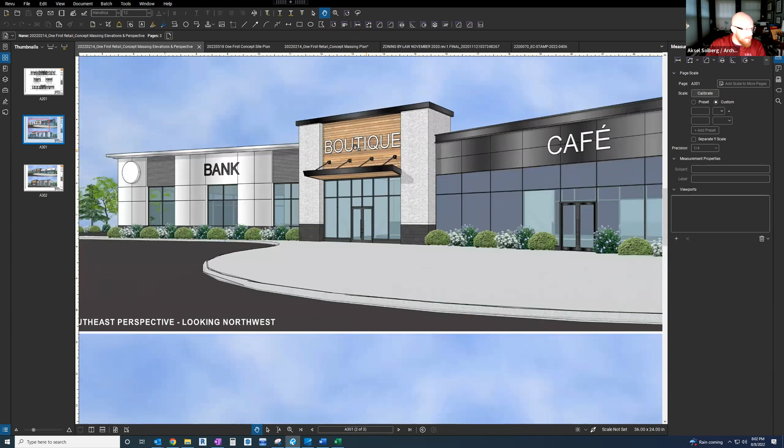There's also some wood plank cladding - this could be a variety of different types of products. And then panels, which could be either metal, fiber reinforced cement, or some other synthetic type of material. And then we have a horizontal corrugated metal to facilitate a little break in the massing and emphasize some signage areas.

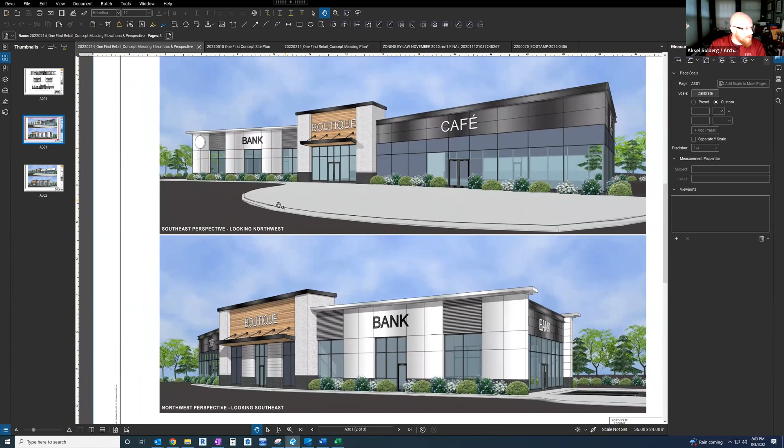So overall, there is the configuration of the site, which I believe everybody has seen for now. Actually, I'm assuming that everybody already has seen this imagery, so my talking points will sort of assume that, but if anybody wants me to stop at any point to ask detailed questions, please feel free to chime in.

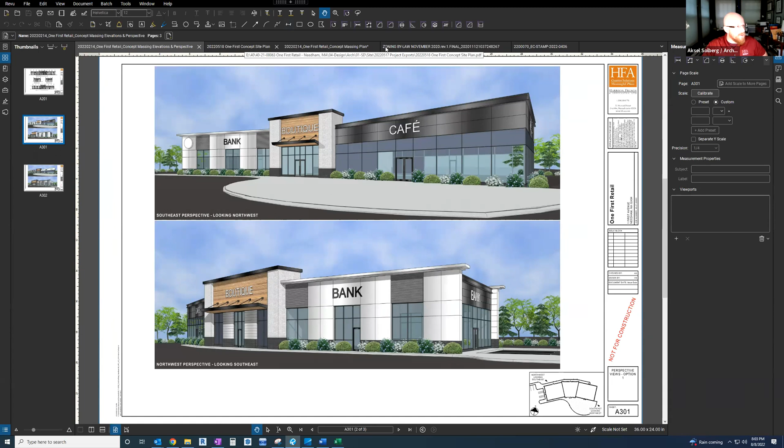Aksel, just orient them on the site plan where this is on first. That's exactly where I was going next. So here we have, let's see, this is the survey of the site.

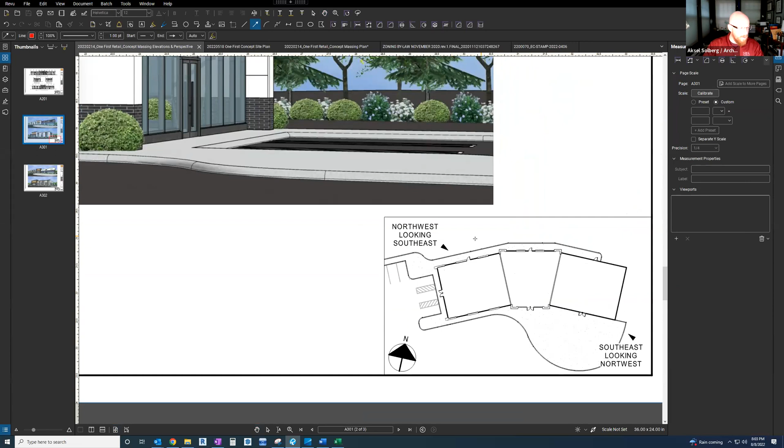So right here, this is Highland Avenue. You're coming off of the highway here. This is where the old Acapulco's building is - you can see the footprint on the survey of the site. So now if we go back to the key plan here, Highland Avenue is right here, and the entrance off of the highway is here. The Acapulco's building was generally somewhere right around here.

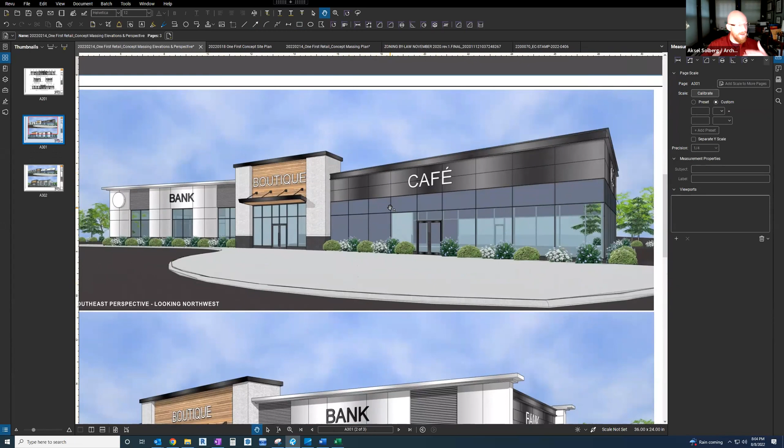So from this side, we're looking at this perspective from the vantage point of standing in the parking lot, looking at the side of the building which faces inwards towards the Innovation District. Down here, you could imagine yourself in a vehicle on Highland Ave waiting at the stoplight, and this is what you would see. This is kind of just a basic visualization. Further renderings would be more polished, but I think this gives the overall vibe and design intent we're going for.

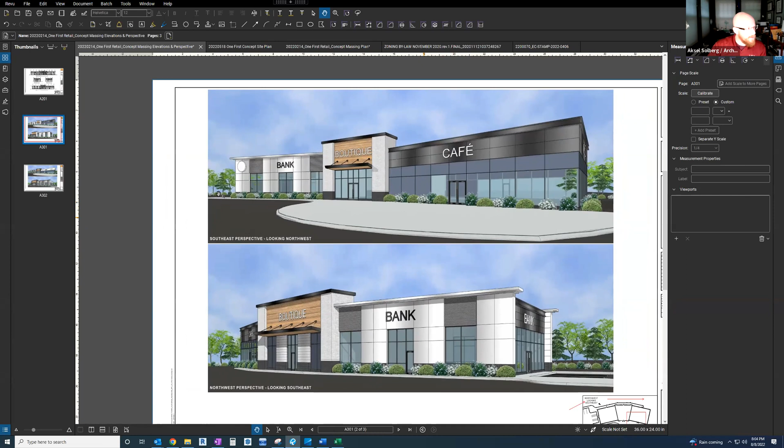The massing varies in height just to provide some differentiation for each tenant. Here's the elevation unfolded view looking at the building from the new parking lot we would be creating. Actually, this view is from Highland Avenue. On the right, you have the bank tenant. In the middle, you have the retail tenant. On the left, you have the restaurant tenant.

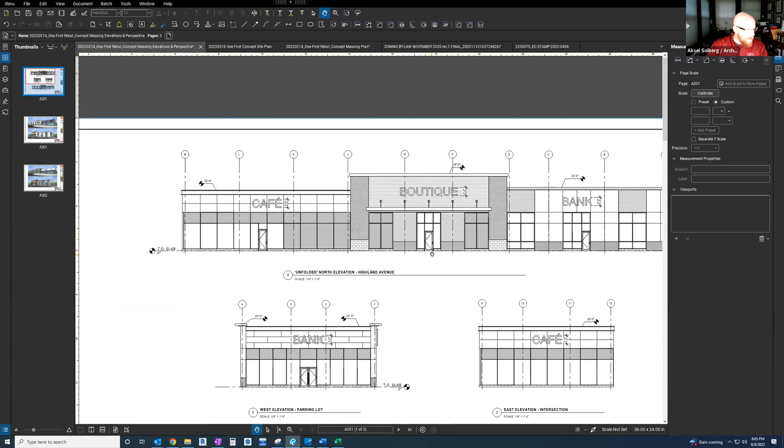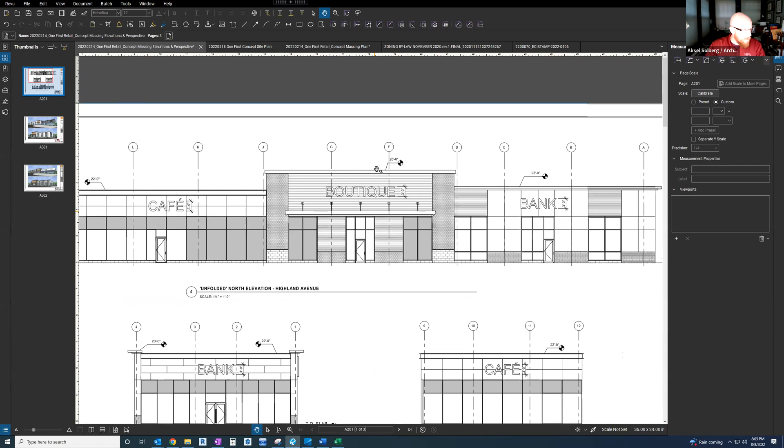The building is designed to be four-sided, quote unquote, so that any vantage point of the building feels like you're looking at the front. There's no back of house that you're seeing, so no ugly facade is presented to any one perspective. Signage area is maintained at a comfortable eye level above grade. We have a maximum height of 28 feet, which is still well within the means allowed by zoning.

When viewed from the parking lot, the retail tenant is given a little more height to establish dominance, knowing that bank tenants aren't usually so concerned about the pop of the brand, given that the location normally sells itself. The restaurant tenant, we wanted to go for a more modern, sleek vibe, knowing there are restaurant tenants we could go after who are attracted to this type of aesthetic.

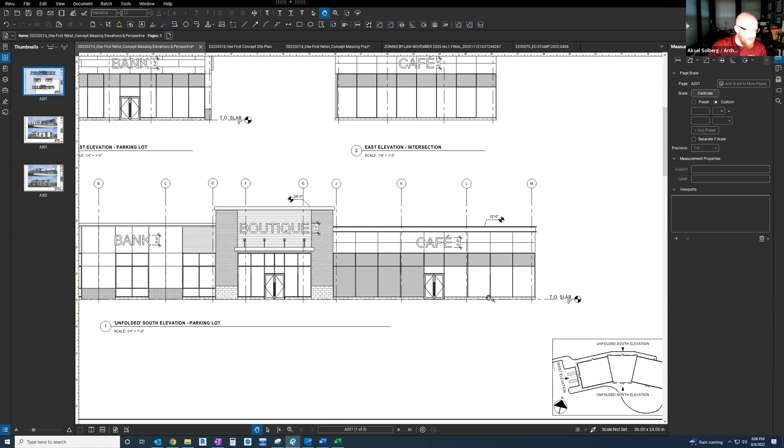The areas shaded gray in the storefront elevations would be spandrel glass or opaque. The reasoning is to provide the restaurant tenant some privacy or screening for the back of house functions that normally accommodate commercial kitchens. That way you keep all the inner functions hidden, and really the only transparency is into the actual seating area itself, so you can see all the vibrancy and activity happening inside.

So here's how that would look. You see the opaque panels provide some privacy, and the interior design would shine through in that regard. I think overall that's the nutshell summary of the building.

For the retail tenant, we gave them a prefabricated suspended canopy to provide some cover from the elements. The restaurant tenant has a comfortably sized seating patio, which would be landscaped and developed using a nice texture of materials to create an ambiance that invites people in from the surrounding innovation district. And then the bank as well.

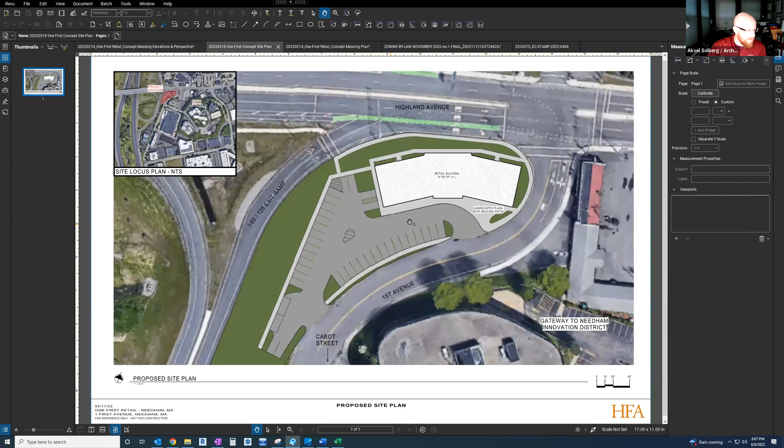Our site plan right now is preliminary at best, but it's showing proof of concept that we can achieve configurations of parking which get a good count. This is just one of the few options we've explored, but here you can sort of see the intent behind what would happen with the landscape area. I think I've probably talked long enough, and I'm happy to answer any questions or concerns.

In terms of the theme, today's retail is very much into glazing and glass, whether it be cafe, restaurant, or even banks. So the intent was to have a lot of glass in the building. We didn't want to introduce any more red brick to the innovation district—there's enough of it already with the various office buildings and residential uses there. So we want this to stand out.

We realized this is a very important gateway, not only to the city, but certainly to the innovation district. I think we've instructed Aksel, and he's been very successful coming up with a unique looking building—very attractive, certainly very contemporary, but in terms of scale, fits the site very well.

All right, thank you. That was very thorough. So Bob, do you want to start off with questions, comments?

Yeah, sure. Thank you, Mark. Thanks for that presentation, looks good overall. A couple questions, they may or may not be in our purview, but I'll throw them out there. You're probably thinking about them with the planning board. The site plan just looks real close to First Avenue, so I'd be curious what the actual setbacks are. And somewhat related, for any of the spaces, you commented on back of house, but deliveries, dumpsters, trash removal, those kinds of things, how might that affect the look of the building? That's more of our concern. I think site plan is more planning board, but that's what's going through my mind right now.

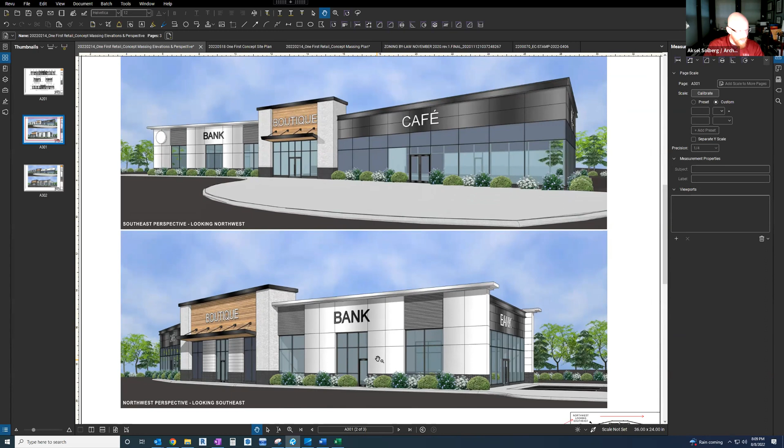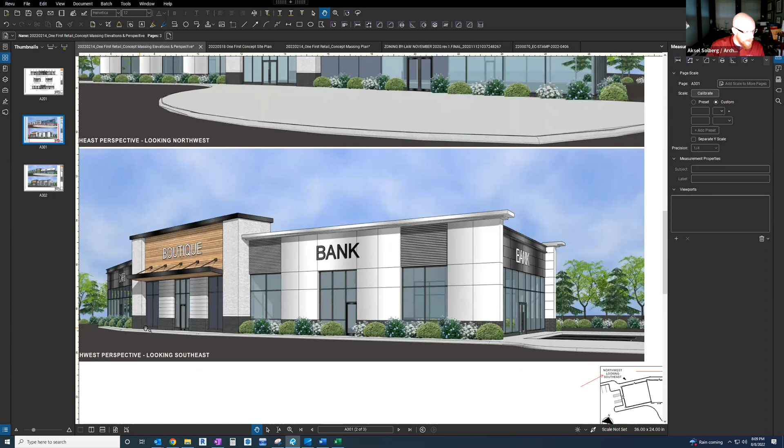Absolutely. Yeah, so the setbacks is something we're aware of, and we're definitely going to bring that up with the planning board. As far as service, even though the building is designed to have a front on each face, the facade that faces Highland Avenue would technically be that back of house facade. So each of these egress doors you see here is intended to provide function for deliveries and services and things like that. Our intent is to use a sidewalk and path which leads you to the back corner of the site, so you can see the intent of the sidewalk illustrated here, and this sidewalk would carry you to the rear of the site where dumpsters and trash would be.

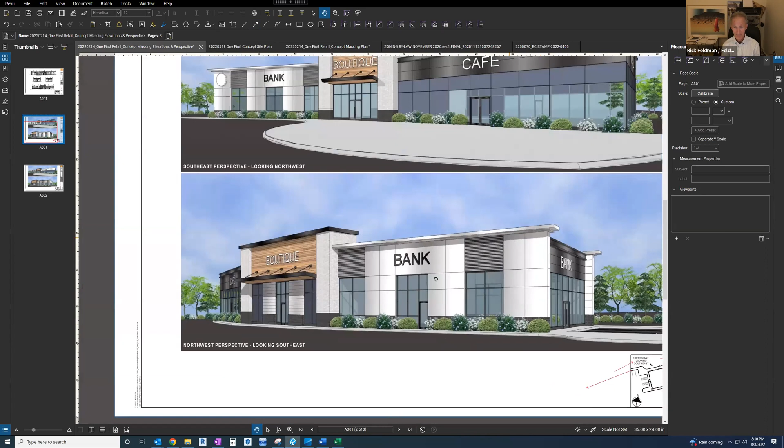Okay, all right, thanks. And I can comment also, in this recent world of retail, most deliveries now are coming from the house with UPS, FedEx, Amazon, and even a lot of retailers don't want a rear entrance for their staff or deliveries because of pilferage, whatever. So the trends have changed recently, it's like everybody's now coming in the front of the house and making it work. And we do have a kind of remote dumpster location that's skewed over the end of the site there, and that will be protected with a fence, etc.

Okay, thank you. Yep, I guess the only comment would be as you go forward, the planning board will probably make you come back if you make modifications, and also for landscaping review. But we always like to see what those enclosures are and how they work with the building. So whenever you figure that out, and you're back with landscaping and some of the other items, it'd be great if you include that in that return.

Chad, do you have any thoughts? Yeah, I think the main things that Bob hit on were exactly what I was thinking about.

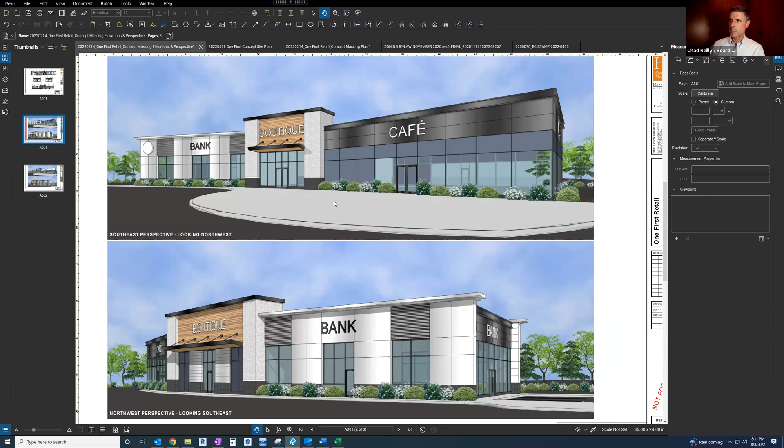I do notice in the package there's a light scheme and a dark scheme. I'm guessing the lighter scheme, where the bank is light and the central boutique pavilion is on the lighter side, is a bit more versatile when it comes to attracting tenants. And the cafe in the rendering kind of looks like it's black, whether it was really black or more of a space gray or something, is probably worth exploring. But yeah, I think that's the darker scheme, so I'm guessing the other one might be a little more versatile in terms of range of tenants and things like that.

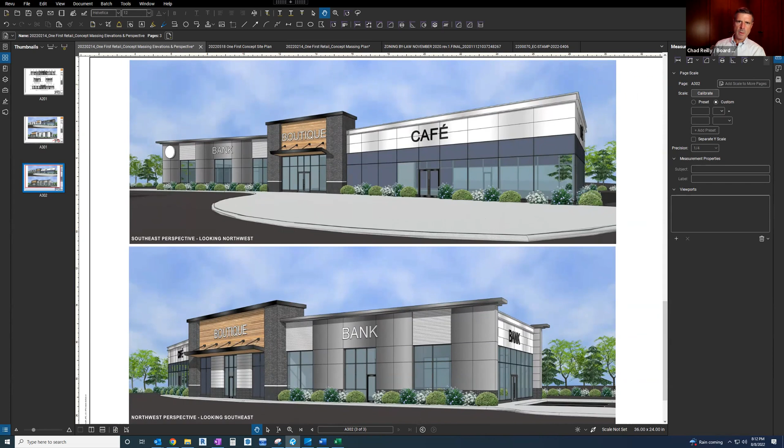Maybe this is a more updated version, but the packet we have has two different pages of renderings. So that doesn't look quite like... no, actually, that is the one we have. So yeah, I think that was the one I'm thinking, lighter colors maybe more appealing to a bank. The lighter color in the middle might be more appealing to a broader range of retail tenants, but I think the light with the wood is a little bit better in the middle with the boutique than the dark with the wood. And in that one, I don't know if you necessarily want to go all the way black, or something a bit more metallic, in the cafe area.

Yeah, you're absolutely spot on with your commentary on the colors. We wanted to entertain a couple of options at this point, knowing that some tenants have preferences for certain color palettes. As far as going black on the panels, it would depend on the material of the panel itself. True black can often absorb a lot of heat and start to warp over time, so that's always a concern we have. Most manufacturers of metal panels and even fiber cement products don't offer a true black, but there are solutions to achieving that type of bold statement as well. But yeah, absolutely, we intend on exploring the colors further as this progresses.

Okay, well, to follow up on that, I think... is this so far the preferred scheme, the one you're showing now, or is there not really a preference yet? You're still evaluating? I suppose that would be a matter of a subjective response on my part.

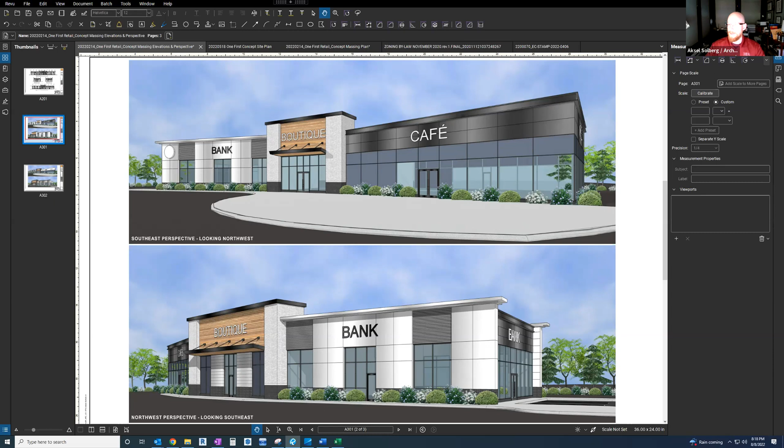Well, that was fun, a little different. So the next item is 1063 Great Plain Ave, Needham Bank. I'll let Peter take it over.

Thank you, good evening. First, I got to ask Bob, is that a real picture behind you? Is that a real photograph? It's a real photograph, but I am not real in the photograph. Okay, I was getting a little jealous there for a second. That's almost his real view. Almost. If you're curious, that's the view from the lighthouse in Scituate.

Thank you, for the record, I'm Peter Zucker, the attorney on this project. Also on is Jim White, executive vice president and chief administrative officer, and also Ron Quicquaro, the project architect with Studio Q - he probably shows up as me because I think I forwarded him the invite. So just quickly, then I'm going to turn it over to Ron.

The bank is essentially modernizing. As banking habits change, the bank tries to keep up with that. We have a combination of things going on here. One is that, and it was coming before COVID but COVID really brought it on, the number of people who visit a bank or conduct bank activities has dramatically decreased. They've seen a significant increase in online and electronic banking, including my 90-year-old mother who uses Needham Bank, and a decrease in people who physically come to the bank. When they do come, they either want to go to a teller window or an ATM.

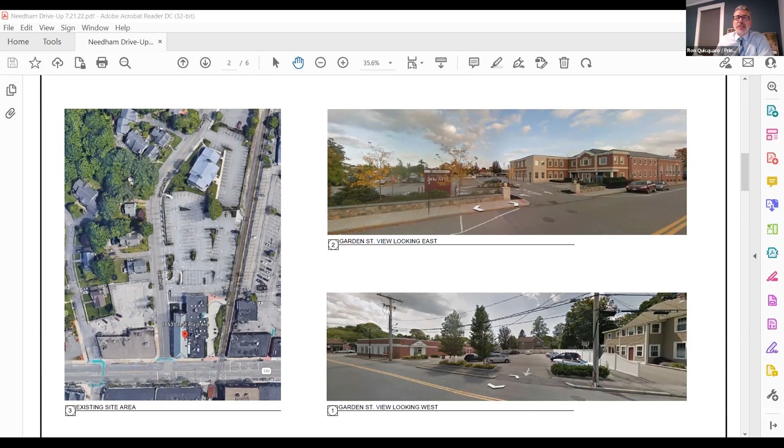Essentially, we worked to kind of balance working with the context, matching the existing main branch, and then still having a building that can kind of stand alone.

There's essentially a drive-up window with some millwork, a support person, some equipment, copy machine, etc., printing within the space, and then a bathroom. That is essentially the entire program.

There's a canopy that comes out over the first lane fully, and then about a halfway over the ATM, which is in this island. So 2 lanes is what we're looking to accommodate.

There is an existing wall that's in place now that stays. We're within the setbacks. There's a main entrance kind of tower piece - you'll see the sort of massing in a minute. And then we screen any mechanical equipment to the rear of the building.

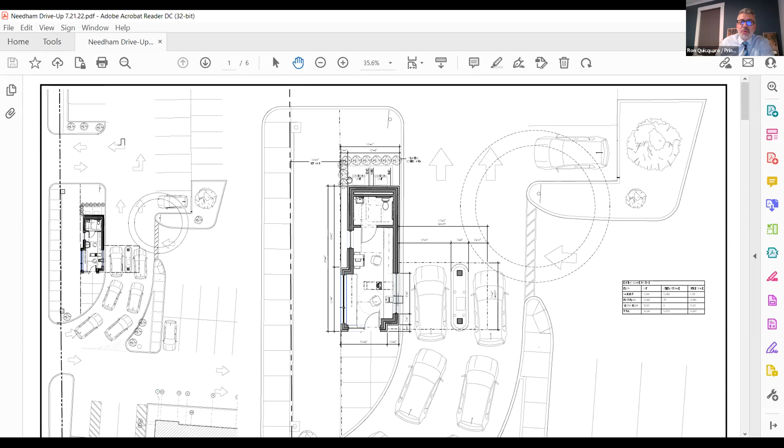Now, we're kind of embarking on the design development phase, so I think what we've shown here isn't even very accurate. There'll probably be 1 condenser, one of those half condensers that go with like a Mitsubishi split system. I think the mechanics will be very simple in this building.

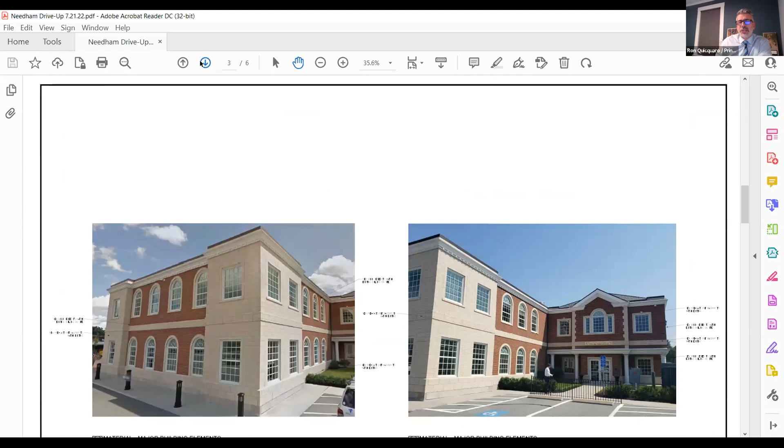Any signage you see is placeholders - that's a totally separate permit and process, is our intent. But again, we tried to balance working with the context and still having a building that matches the main office and having enough character and mass to be able to stand on its own as well.

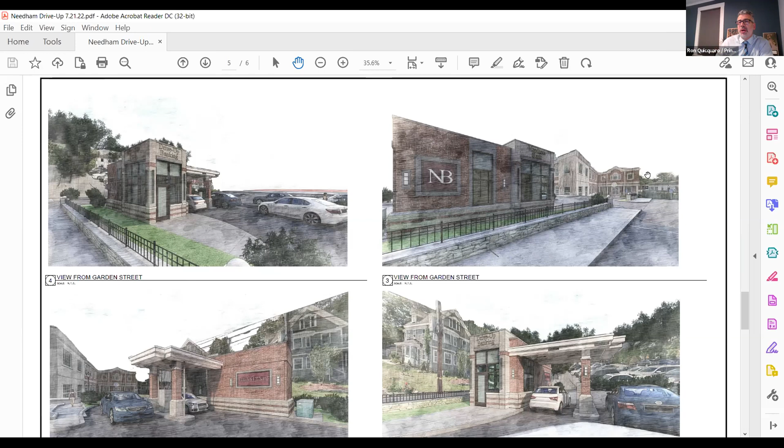If you kind of walk down that walk and turn and look back, you'll see the building from this view and the main branch, the parking area. This is on the lower left is a view of the parking area, and then the lower right, the actual drive-up lanes. Anytime you have a drive-up and a canopy, you need to strike a balance that you don't end up having what looks like a gas station or some service canopy.

So we've added some detail and tried to integrate what we did with the canopy into some of the detailing of the overall mass of what's being proposed.

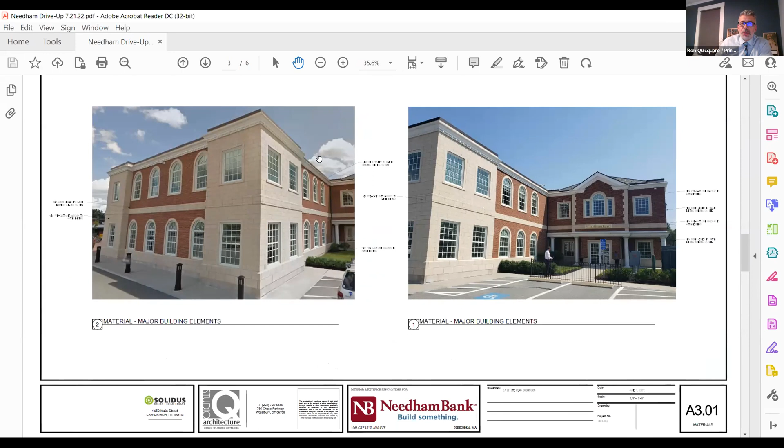The palette essentially is what's there now. There will be a combination of brick and precast with some of this white trim, the rusticated base, the soldier course banding, all intended to be part of this new design as well.

We're dialing the details a little bit just to add a little more character, try to get this building to be a little more of a gem. Because it's so small, we can afford to go the extra mile.

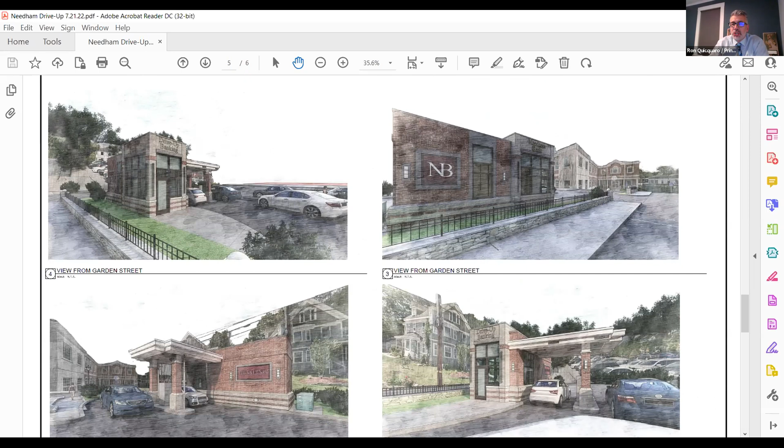So that's essentially the big picture. I can talk a little more about some of the detailing if you like, or just go into questions.

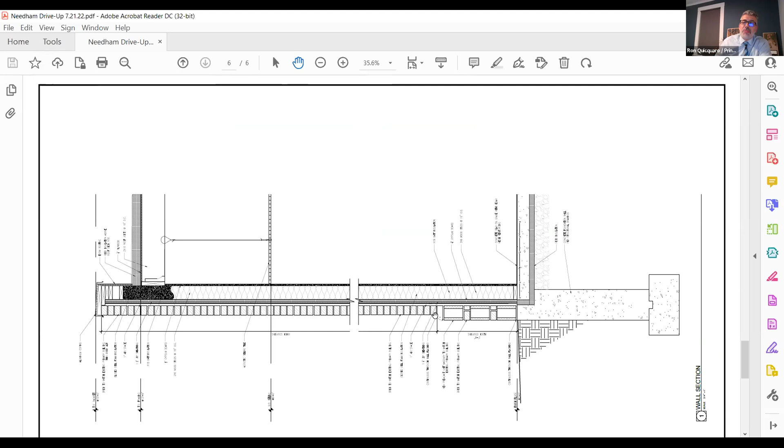Okay. That was very good. Thank you.

So Steve, do you have any questions or comments? No, I'm all set. Thank you. Okay.

Chad? Overall, I think it's a handsome little building. It's the size and the functionality are definitely tricky, and I think you've handled it well.

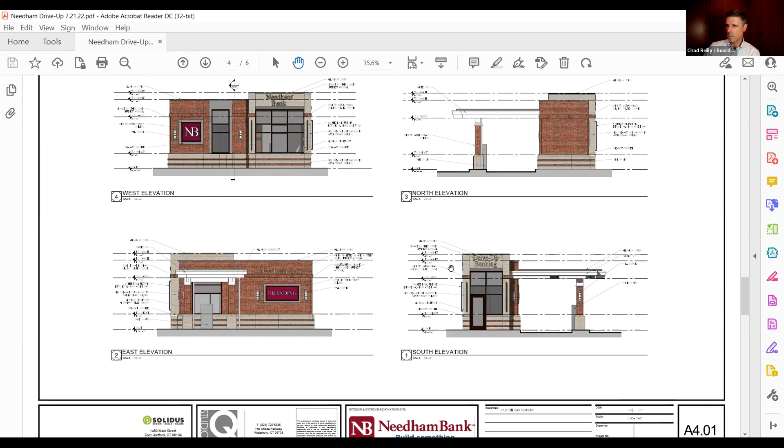On the west elevation, I like the idea of a graphic element there. I think when we are really kind of looking at signage, we'll have to be a little mindful of what we consider a graphic element and what we consider a true sign.

On the parking lot side, the east elevation, that element that's just labeled as branding is a little bit bigger. So that's also one where it'll be a little tricky to sort of figure out what exactly that is, and does it constitute a sign, and how many signs do we really have on a building that's so small.

I think that was our intention with the drive-up banking label on it, but you're right. Today, because of the way the drive-up ATM is situated, it's not really designed well. People get out of their cars and sometimes get in line with other cars too. So this would correct all of those old problems we have today.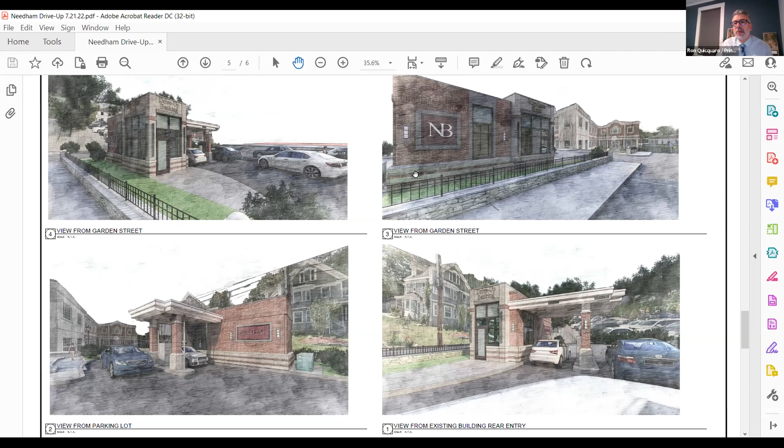Okay, Bob? Yes, thank you for the presentation. I concur with Chad's comments. I think this will help the issues just mentioned, and it's understandable what it is. I'm just going to ask a question, I'm curious to get a reaction - did the team ever consider a pitched roof?

We actually had a number of iterations that we worked through. A pitched roof was one of them. This seemed to work better with the existing architecture, which is why we ultimately went in this direction. The pitched roof was a little bit less contextual than this, so we went this route.

No, I often ask questions like this in these meetings. We don't see all the stuff that's back on your desk, so it's good to hear there were some iterations. What occurred to me, why I brought it up, is in one view you look back towards the bank, which does have a gable on the north side, but then you look at the neighborhood houses - I'm not sure it would work either. It's such a tiny building, it might look kitschy actually, but I'm glad to hear it was at least looked at.

It's a good point - the building is so small, it's a little bit taller than it needs to be. But again, as I mentioned, it needs to have a presence, otherwise it'll look like a pump station. So we were purposeful about that. We also have a minimum height for this drive-up, and we wanted the proportion of the drive-up canopy to anchor into something bigger and taller. This sort of massing seemed to work better.

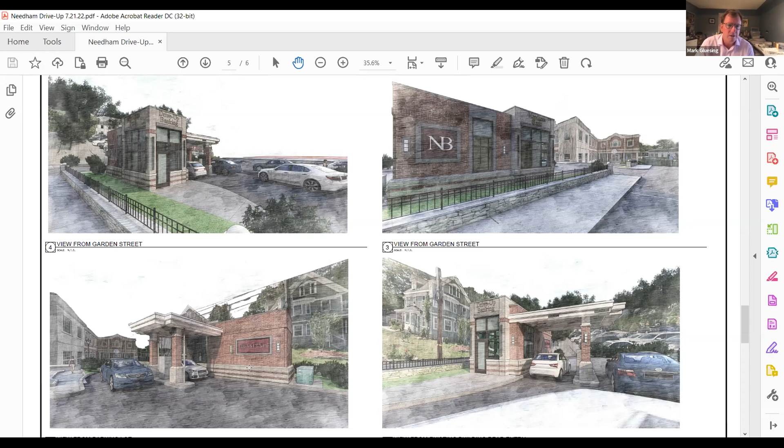My last question would be if you go back to the plan - I'm trying to find my site plan. The landscaping plan shows different planting around the mechanicals than this sketch, but I'm going to assume you'll work that out with the planning board. Yeah, this planting is an intent versus a document for construction. Okay, so that's what the planning board's going to see, more current, more accurate I should say.

Yeah, because I was just looking through the planting plan - I think it's a nice amount of planting.

I do remember that you showed in your illustrations that the ground is raised along the sidewalk, so there's that low stone wall there. The one thing I looked at right away, and I go in and out of that parking lot a fair amount as a customer, is that you're not changing the island. This is partly town parking, partly Needham Bank parking.

They shared the land and developed a workable parking lot layout that wasn't necessarily restricted to either property's boundaries exactly. I see the exit from the double row of parking closest to the current bank, and right now that wiggles around that island and exits out to the street, similar to the one on the left, but it looks like it's a little more of an effort at this point.